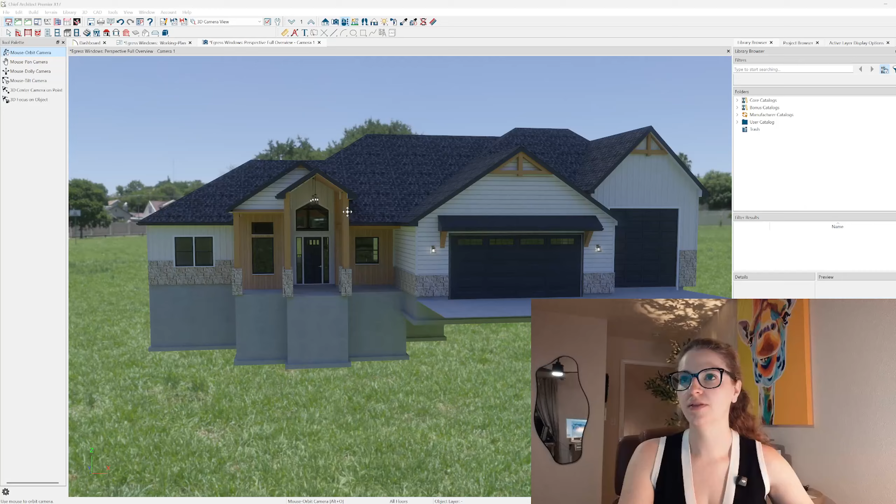So we're going to use this lovely one that I completed recently, and lay out some things that you can work on with it in order to make sure that the windows that you're placing are going to meet your egress requirements. So I'm going to go into this.

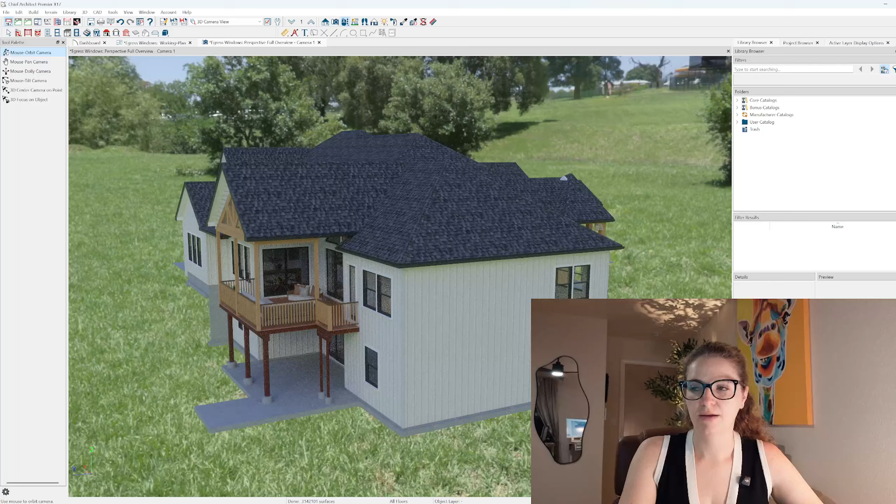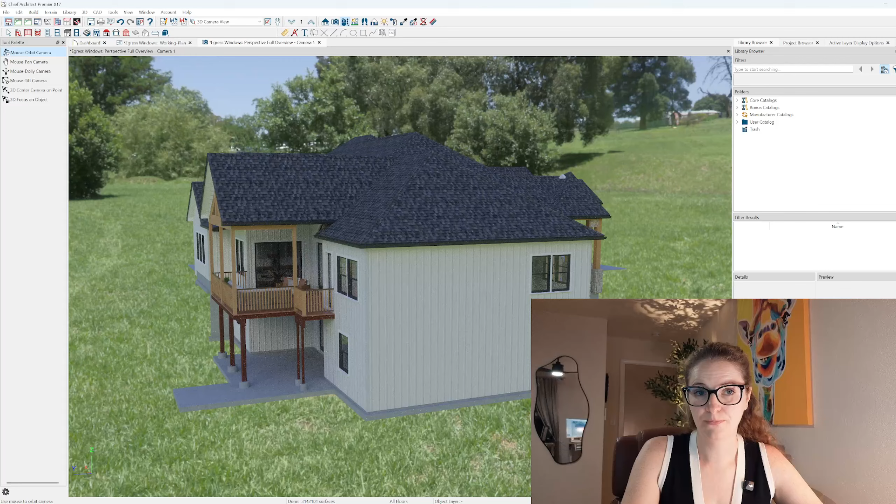It's a walkout basement, but if you're considering looking at bedrooms, you also need to consider where grade is going to be. So in this instance, grade is up here. It's not showing, I don't have it with the topo yet, but being a walkout basement, the grade starts up here and it travels down to be pretty much flush with the downstairs. So this window would be below grade and is going to need a window well, likely. Whereas this one, being that it comes directly to the outside, it can be egress.

So starting in the basement, we're going to look. This one again would need a window well. I currently have a single hung in there, and so we're just going to open it up and look at it. And it's 48 inches wide and 60 inches tall. Now, egress requirements are that it has to be more than 24 inches wide and 20 inches tall, or vice versa.

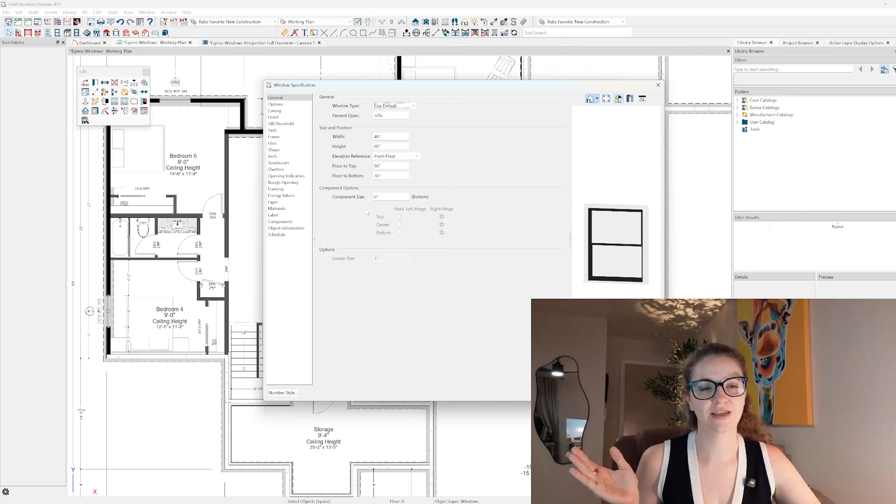I always just rule of thumb, I'm 24 and 24. Even though the code says one of them can be a little less, I just always operate off of 24 and 24. So it's 4 feet wide and 5 feet tall. So this, being that it splits directly in half, is going to be 30 inches tall, and 30 inches is more than 24, so we're good. And then width, 48 is also more than 24, so we're good.

And then it has to be more than 5.7 square feet. So if I do 2.5, which is 30 inches, 2.5 times 4, we're 10 square feet. Plenty of space. And the final box that has to be checked is it can't be more than 44 inches from the floor. So here, this floor to bottom number, you just look at that. And as long as it is 44 or less, you're good. So this one's 36, we're good.

So what I do is I go into options over here and I check mark that it says egress. So any window schedules that I have, it will say egress yes. And that's with the default as well. I use upgraded toolbars, and it has other macros and cool stuff. But even with just the base Chief Architect, it will say in the standard schedule, yes, egress.

So now looking back at these two bedrooms, both of them have ingress and then they have egress. So this is the same size window as before. So we already went over that this size will accomplish the egress. So I'm gonna make sure to check egress on this one. This one has 2 and they're different sizes. So we're going to reevaluate these windows and make sure that they still qualify.

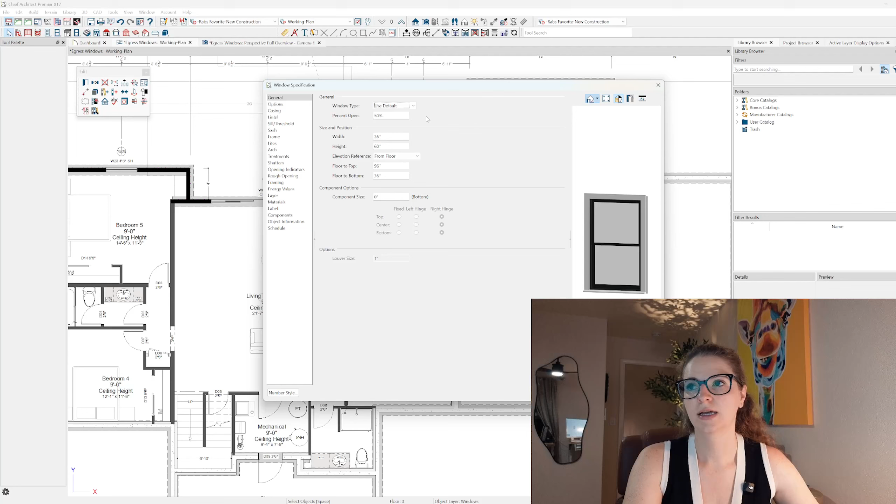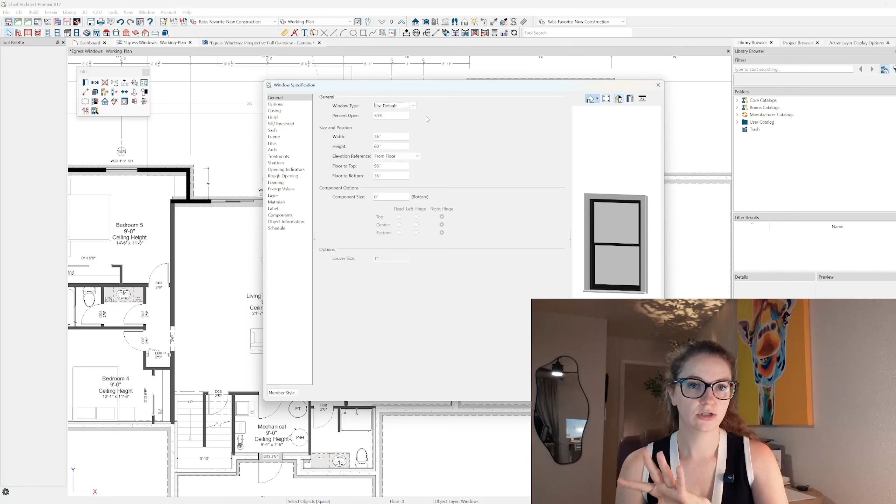The square footage cannot be a combination of the 2 windows. Each window has to stand alone. Does it meet the egress requirements? You only need one that meets it though. So if you had kind of a modern style, a big picture window, and then you had just the operable on the side that's a little bit smaller, maybe your operable meets the egress requirements, and so the picture doesn't have to open. It's fine.

But both of these could work as the egress. So it's 3 feet wide, which again, is more than the 24 rule of thumb that I go with. And then it's 5 feet tall again, so 30 inches, also more. And then the floor to the bottom, less than 44 inches. So both of those are good.

Now, if someone wanted to make this flex room a bedroom, they couldn't, because there is no egress window in this room. And so they would have to cut an egress window of some sort, and over on this side is a crawl, and this side is the garage. So this flex room can never be a bedroom because there's no way for it to have egress. Unless they had some weird kind of window well coming out here into the main part of the living space, and I don't really see that happening.

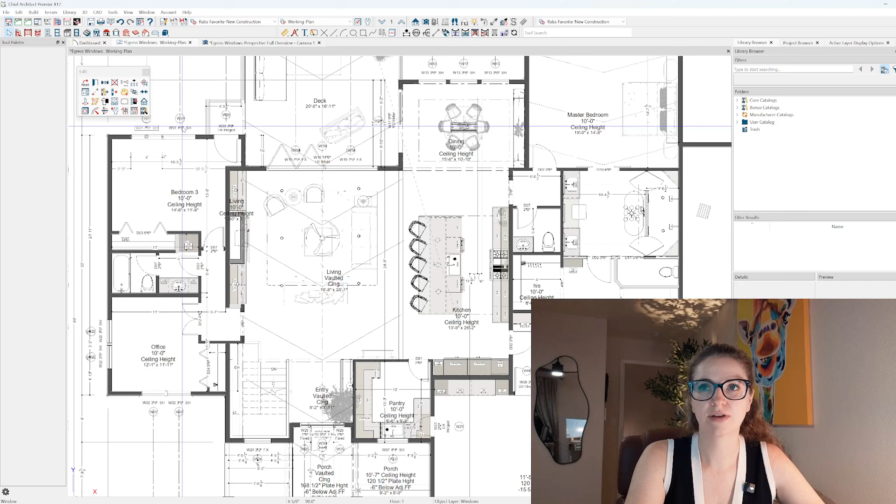Same with this back storage, while a strange shape, could technically be a bedroom in the future. They would just have to put a window well somewhere on one of these exterior walls. I wouldn't want to walk through the mechanical room to be in a bedroom though, so each their own. And then if we go upstairs, so this room, again, it has the 4050 windows. So either of these can function as your egress. So I'm gonna open them both up and check mark egress.

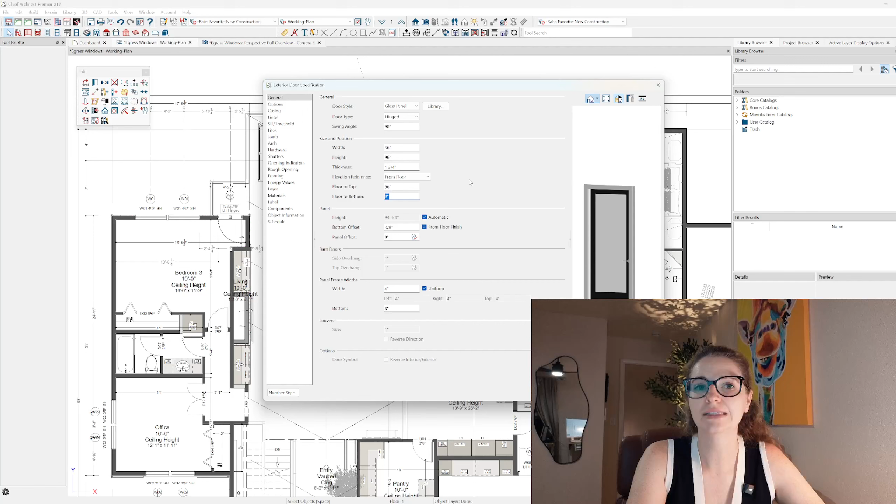But this back bedroom is a little bit more unique in that there's also a hinged door. So the hinged door could act as your egress if you didn't want to put windows on anywhere here, or if you wanted these windows to not be operable windows. You could make them picture windows, and then this door would count as your egress because it's going directly outside, and it definitely fits all the criteria. It's definitely wider than 24 inches. It's definitely taller than 24, and then floor to bottom is 0 because it's a door. So then you don't really need to worry about that one.

This front bedroom has 4 windows. They're all the same. It's labeled as an office, but it does have the egress if they wanted to make it a bedroom. This one, they're not planning on it, and it's got this double door, but if necessary, it would qualify as an egress.

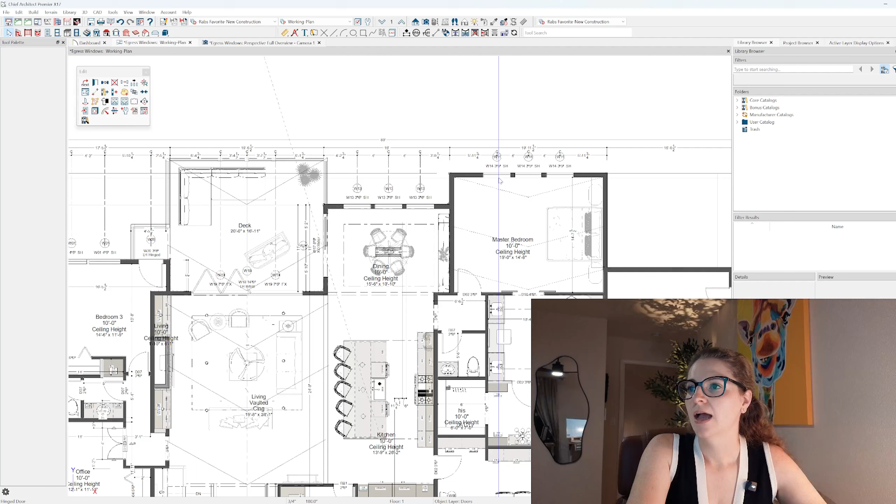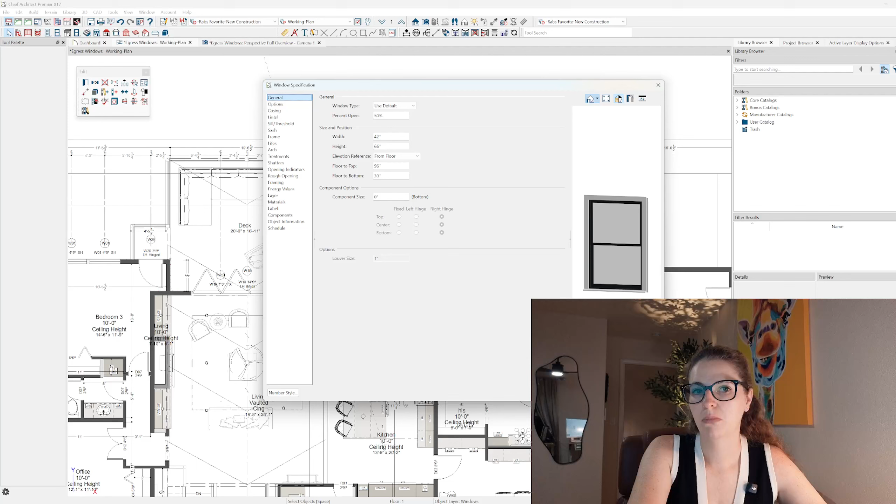And then the primary bedroom, formerly known as master, it is the 3050 again. So we already established from the basement that these will suffice. So I'm just gonna open them up. Option, egress. Now these actually are 5'6", not 5 feet tall. So they are even better. They're 3'6" by 5'6". So both are large enough. Floor to bottom is 30 inches. So I opened them and I selected egress.

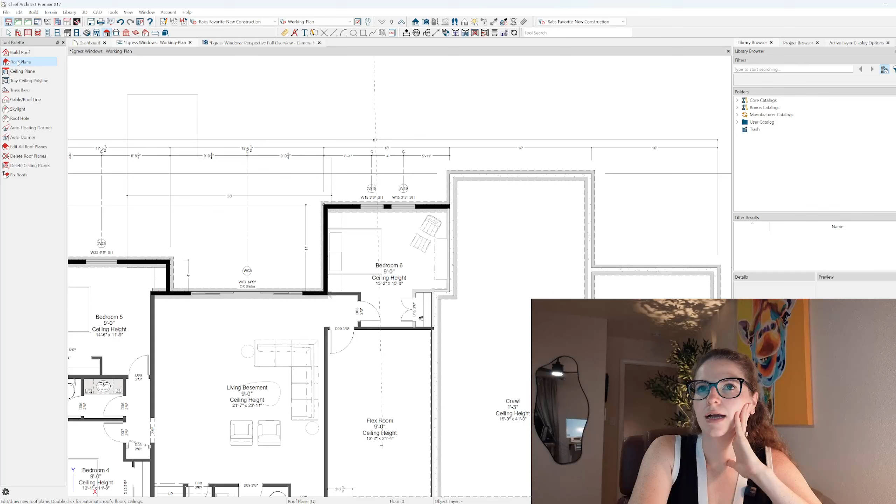Now some considerations to have when you're working on a property. So I'm going to use these windows as an example. Let's pretend that this is a bedroom instead. I know it's the dining room, but we're just gonna pretend. And let's pretend that for whatever reason, we had a covered patio off the back. So I'm gonna say yes. So we're playing with roof lines here.

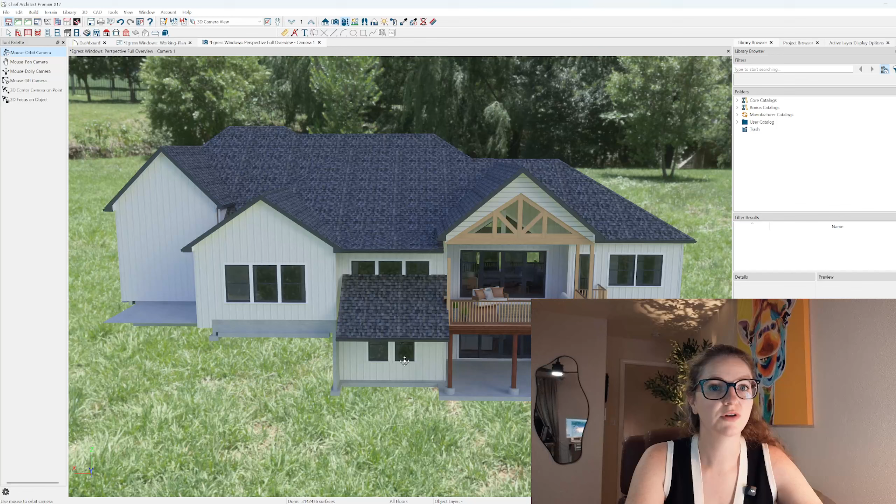This happens a lot with 2-story rooms when you have some structure or something that's covered. So let's pretend this were like someone's front porch, and you had a cover on the front porch that came up, and this is a bedroom, and it's the only logical option for the bedroom's location. So obviously these 3 windows are in the middle of the roof, and that's not going to work. And so the couple options we have to make sure this will work for an egress is we could make it a shallower pitch. So I just opened it up and changed the pitch to a 3. And we're going to let it reprocess.

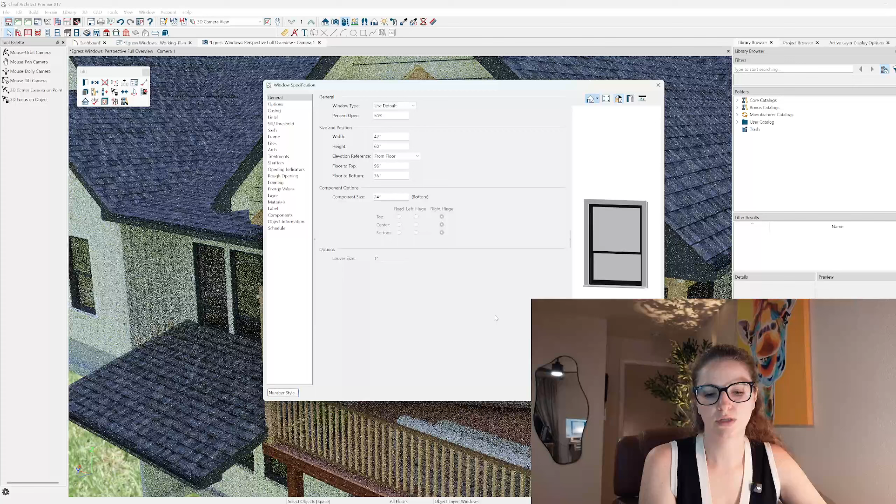And now this is at the very bottom of these windows, but we could just shrink these guys up and say, okay, this bedroom now, instead of 6 foot tall windows, is only going to have 5 foot tall. It also currently only has an 18-inch bottom component. That's not going to work. It's got to be minimum 24. So if I go 24 and 42 here, this will meet the minimum requirements. And then you go 2 times 3.5 is 7 square feet. So we're still good there.

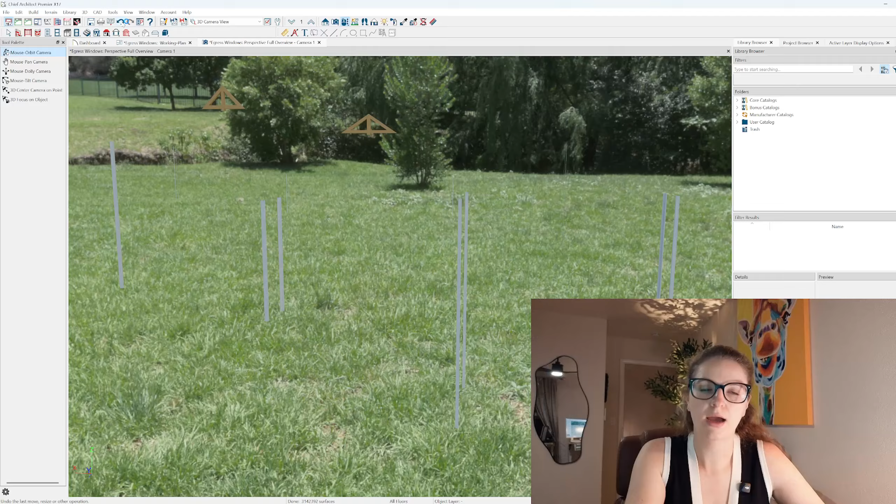And so in this imaginary bedroom, now those windows have been lifted, but they still meet egress. And then it would give that space a little bit of extra definition. The other option that we could have looked at, let's say for whatever reason that roof pitch had to stay at an 8. I don't know why you wouldn't be able to modify the roof pitch, but strange things can happen. Let it reprocess.

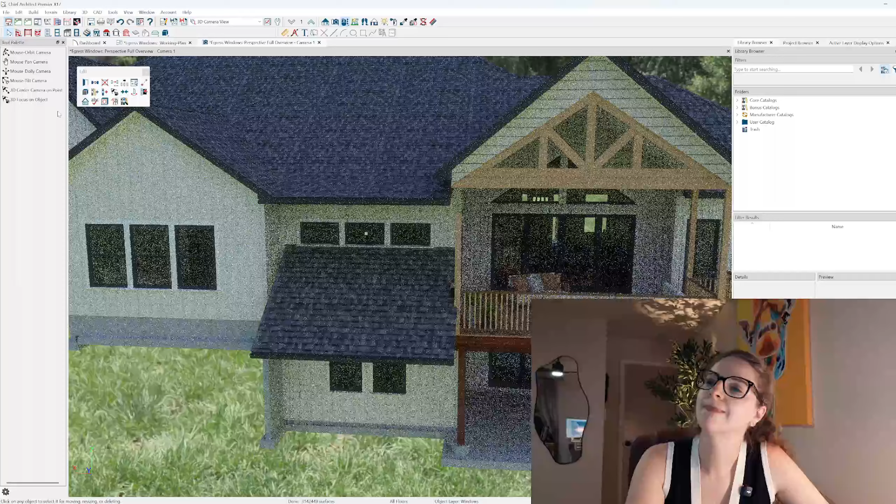And we're gonna see kind of what's going on here. So if I open each of these and I make it only 24 inches tall, just to see what happens. So those windows technically would just barely scooch by on not touching the roof.

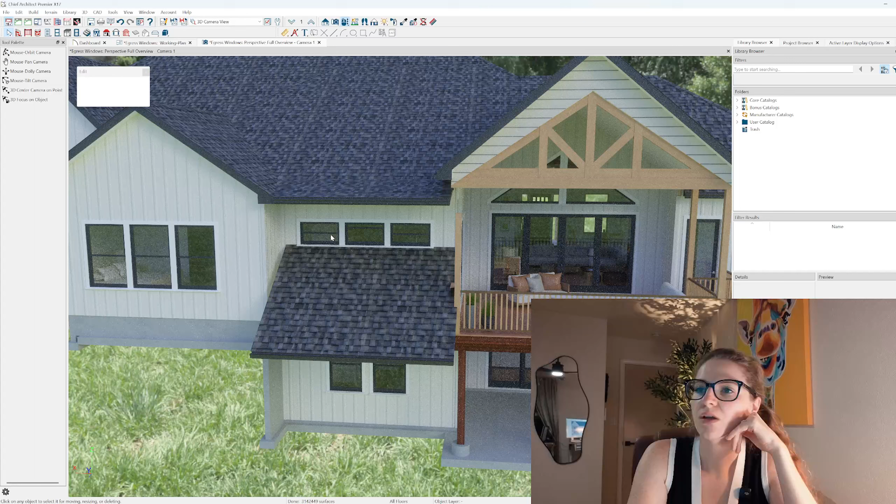So let's say that you just absolutely want them to be this size, and this is a bedroom in here, and you're like, oh, it's fine, I'll just have the bed underneath there or something. Well, now we got to check the rest of the requirements. So each of these individual windows, they are 3'6" wide by 2 foot tall. So 3.5 times 2 is 7 square feet. So we are okay there if each or at least one of these opens.

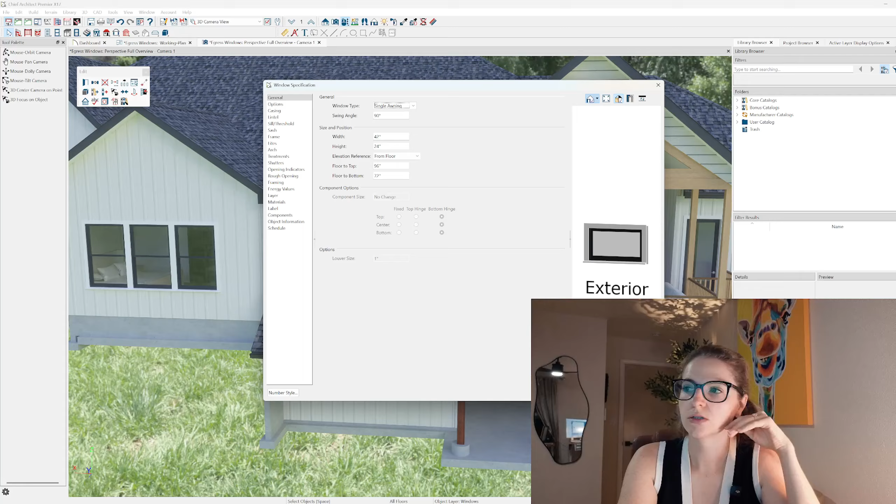So you can either have a casement, or in this instance, you probably would want an awning, so it opens from the top. So we're going to swap those out. So technically, this meets the square footage requirements and the operable requirements, but it is not meeting your 44 inches from the floor requirement. It is 72 inches.

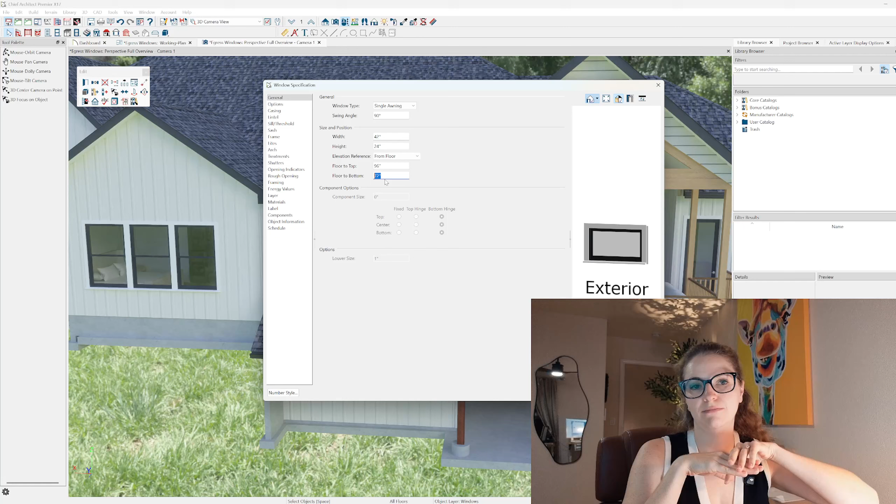So the only way that this could work is if you had steps with a platform of some sort that goes all the way up to only 44 inches from the floor. So we'd have to have something 28 inches tall, whether that's a tiered bookcase or actual steps up to it, and it has to be a permanent fixture. It can't just be a piece of furniture. So I would go back to the client and I would say, you know, we really need to lower the pitch of this roof line.

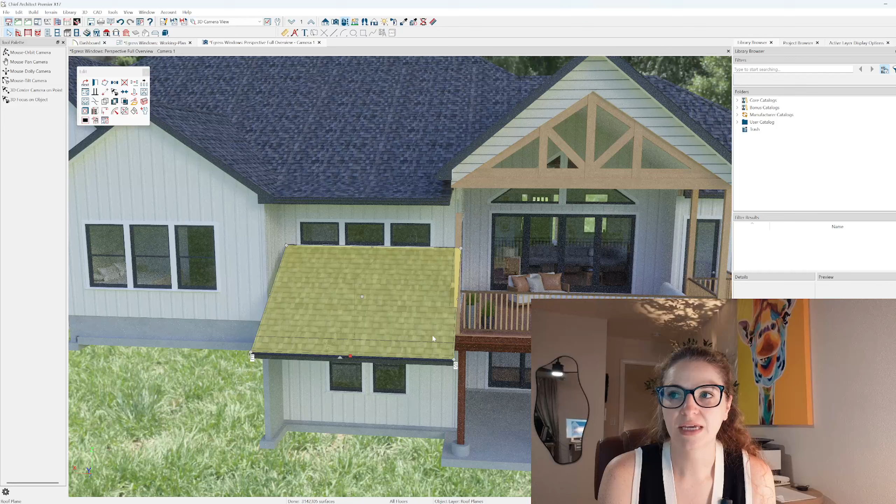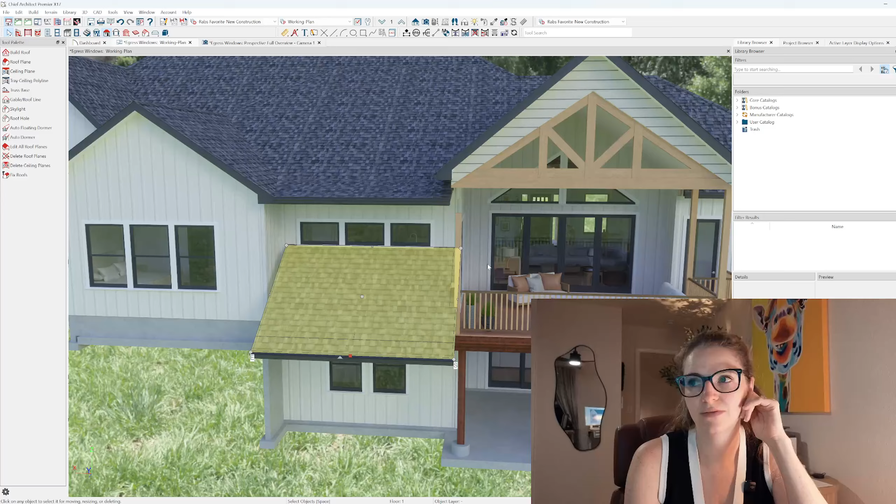If this were a remodel and that is a room that didn't used to be a bedroom, but now you want it to be a bedroom and you can't move the roof, then your next option is you're just going to have stairs of some sort that would walk up so that you could get out. This isn't a perfect example because I do have this deck right here that if this were my imaginary bedroom, I've got a slider right here that qualifies, right?

But just imagining that the deck doesn't exist or access to the deck cannot exist for whatever reason, and you have to make egress windows out of these, you're going to have to do something, whether that's a permanent built-in desk at 30 inches tall so that desk is what you can step up onto and get out. But like I said, it's got to be permanent. It's got to be built in. It can't be movable. It cannot be a piece of furniture.

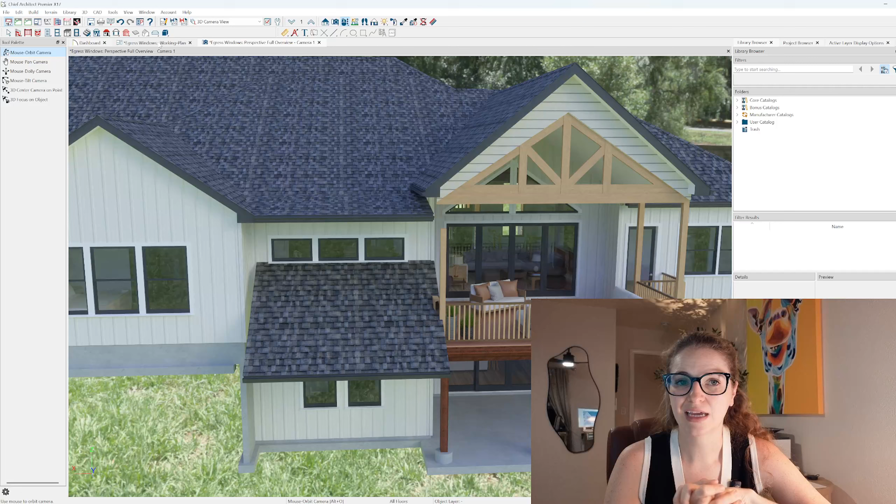And sometimes permitting bodies really don't even like to allow that as a workaround. It kind of depends, I think, who's going to be reading your plans. But while technically you could argue, oh, well, you can just step up here, some people differ in their interpretations of what is permanent and what would count for that. So it's just things to keep in mind.

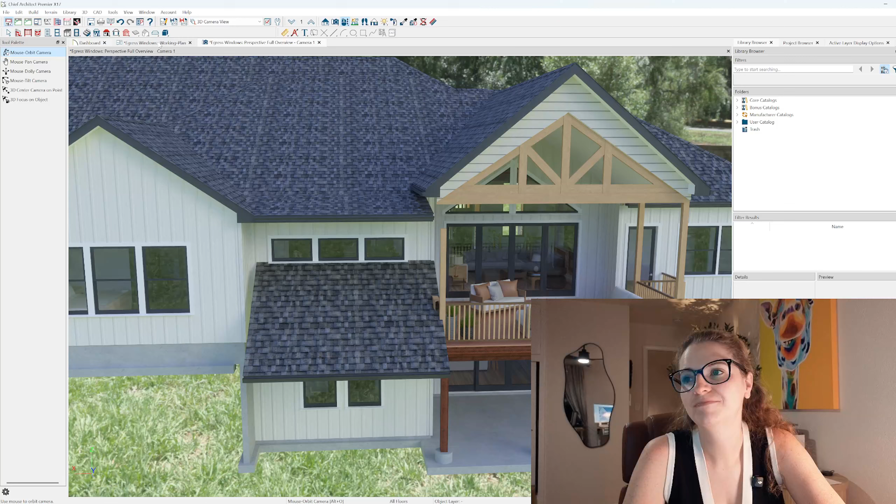Maybe you do a bed platform that is completely built in and 30 inches tall for whatever reason. It'd be a really tall bed. But if your platform is up there and it's accounting for those 44 inches, then that does count. So something to keep in mind, especially when you're converting spaces in a remodel that didn't used to be a bedroom into now being a bedroom.

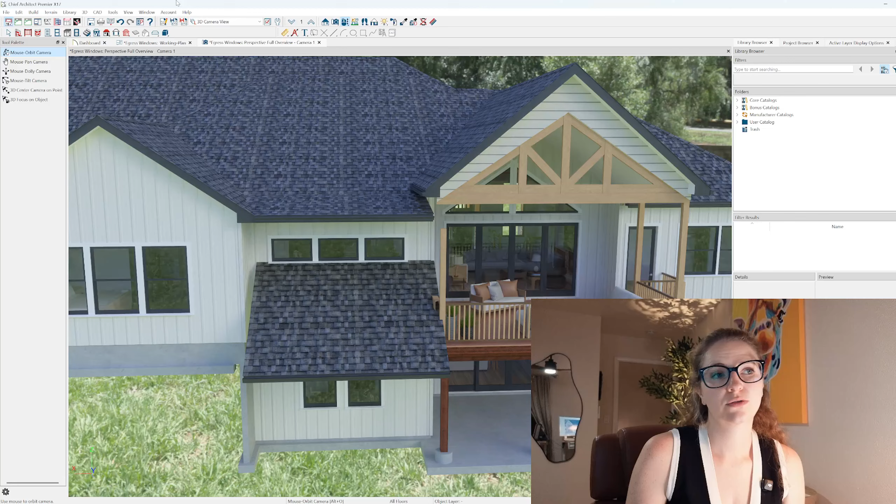And also when you're doing a remodel, just because something has been used in the past as a bedroom does not mean that the egress requirements are automatically satisfied. So you really need to look at each of those bedrooms with a bit of scrutiny. And if you have to bring it up to your client to say, hey, this is not going to work, you have to be able to back that up and say, for these reasons, you can't have this be a bedroom. I don't care that you've been using it for a bedroom for 20 years. You shouldn't have.

And you need egress so that people can escape during a fire. It's a safety thing. It's not just to be dramatic. So look at all your bedrooms. Make sure that every bedroom, every time, meets your egress requirements, and then make accommodations or alterations in order to make sure you always have egress. So that's how you check using Chief Architect specifically. And don't forget to check mark egress, so in your window schedules it's going to say yes, egress.